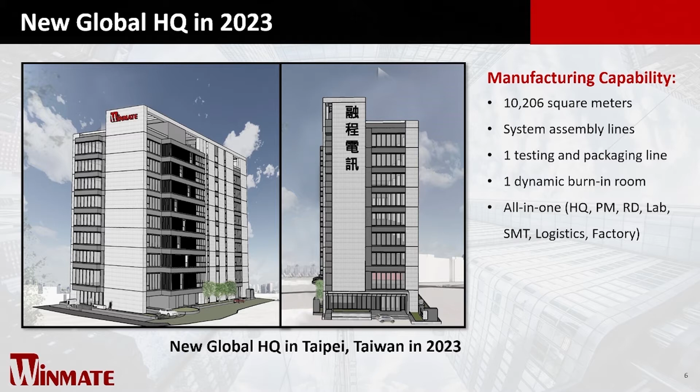Let's get on to business. The topic we are going to discuss today is heavy-duty applications.

Here's the agenda today. Firstly, I will give you a snapshot about the market trend, then I will introduce the heavy-duty industry and related challenges primarily. After that, I will talk about what target markets we are aiming at and how to overcome industrial challenges with our FM product family. At last, you will go over our successful stories and understand why Winmate is every customer's best mate.

IoT is one of the most popular terms in recent years, and the market for IoT has seen a somewhat unexpected acceleration. The number of IoT devices is at 7 billion in 2018, and the amount is expected to grow to 21 billion in 2025.

This number doesn't include smartphones, tablets, laptops, or fixed-line phones. Also, simple one-directional communications technologies such as RFID, NFC are not considered. The compound annual growth rate is 10 to 17% from 2018 to 2025.

The significant connection growth is mainly driven by IoT devices. Most specifically, IoT devices are both on the consumer side, such as smart home, as well as on the enterprise or B2B side, such as connected machinery.

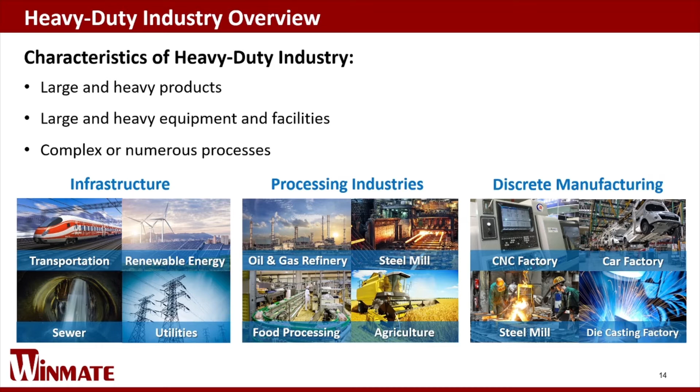Actually, IoT is everywhere, and it finds its way to different vertical markets and applications. In addition, it helps industry with data collection, data analysis, and real-time control, such as smart energy, smart manufacturing, public utilities, and many more. IoT has also been applied in smart energies with products like smart meters, which collect data automatically and apply analytics to track and manage energy use, such as solar energy, wind energy, power substation.

In the manufacturing field, IoT has proven to be highly beneficial with data collecting, sensors embedded in the machinery to warehouse shelves, allowing the workers to have a full track of all the problems and resources, thus making work more efficient, including oil refinery, steel plant, and power plant.

According to the public utilities, IoT can assist in collecting data from the environment. It will enhance security and promote IoT convenience like status monitoring, remote control, and facility management.

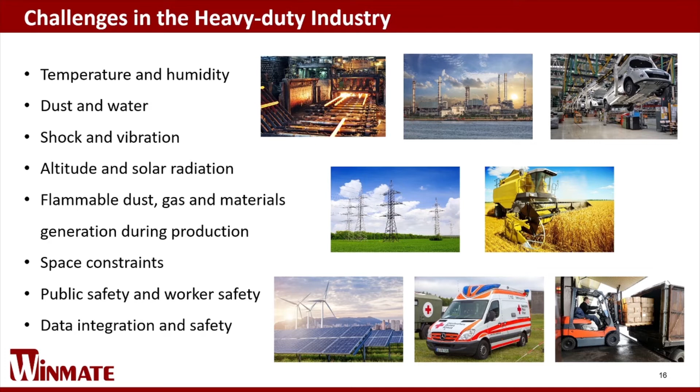However, we are still facing many challenges in different scenarios due to critical and demanding environment factors. These factors may be temperature, humidity, dust, water, vibration, explosion, hazardous materials, and they may make customers fall into dangerous situations or lose money. In order to overcome this issue and solve customers' problems, we may launch the versatile and ultra-rugged products for heavy-duty applications. I will introduce more detail later.

As I mentioned, the scope of heavy-duty industry is so broad that I will focus on heavy-duty vehicle applications. Other heavy-duty applications such as oil and gas, railway, IoT, or smart manufacturing have their own features or certifications. We will discuss those in another webinar topic.

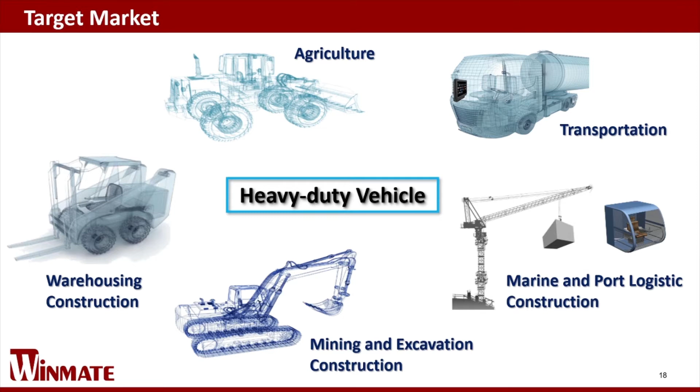Based on the thoughtful and rugged design of our panel PC, the FM product family will not only be adopted in the general vehicle market, but also in heavy-duty vehicle applications. The related vertical markets include agriculture, transportation, marine and port logistics, mining and excavation, warehousing, construction, and so on.

Tractor and harvester are suitable for farming and agriculture. Precision agriculture relies on advanced technologies such as field positioning via GPS. FM series panel PCs are equipped with external antenna for GPS to provide accurate positioning. Operators can use Winmate panel PC to show complete information such as landscape, soil type, plant species, schedule for seeding, watering, harvesting, or environmental variables.

Forklift is for warehousing and construction. The related purposes include asset management and tracking, inventory management, order selection and staging, distribution visibility, shipping and receiving, or working tasks.

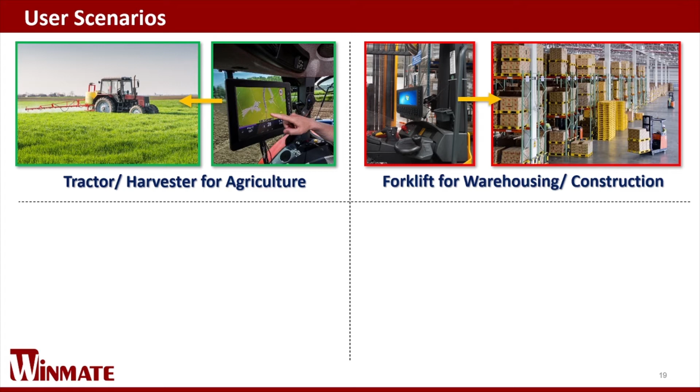Each forklift is outfitted with FM series panel PC, supporting wide range power input from 10 to 60 voltage with ignition control. Every time the operator moves an item into or out of a warehouse, they simply scan a barcode and enable real-time pallet tracking via ERP systems. When there is a forklift breakdown, the user can detach the device from the dock and then move it to another spare forklift, dock it, and it's ready to go.

When the display cracks or panels break, the user can replace the front panel in the field to reduce service costs and prevent productivity loss. Whether using Winmate FM series panel PC in the crane for port logistics, excavator for mining, or building construction sites, it can help our customers enhance efficiency and accuracy, improve productivity, and minimize error.

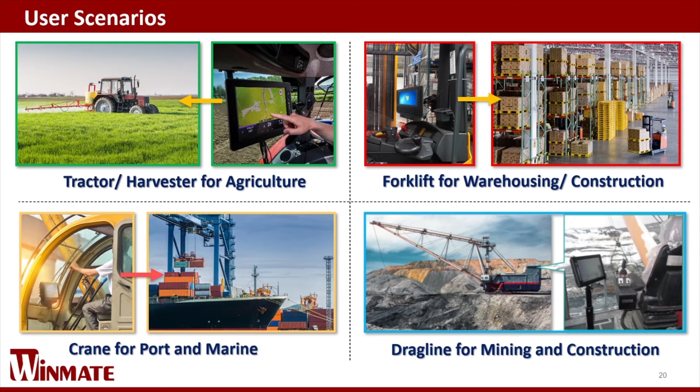The FM series panel PC with docking delivers full computing power without compromising space in the cabin. It guides crane or excavator operators in real time to eliminate unproductive moves and increase handling capacity.

Besides heavy-duty vehicle applications, our product can definitely be used in the general vehicle market, such as bus, police car, ambulance, taxi, fire engine, or truck separately. Some of our products even combine with cameras to enable more artificial intelligence and business intelligence applications.

Smart transportation solutions include elementary systems such as car navigation, traffic signal control, container management systems, and many more. It also includes advanced technologies that provide real-time data such as parking guidance and information systems, weather information, among other customized solutions. Evolution of smart transportation has resulted in several technological solutions across the globe.

These solutions include real-time navigation systems, accident aversion, and smart parking guidance, detecting traffic and rerouting traffic based on road and weather conditions, and so on. Smart transportation tools also allow users to track and manage fuel consumption. All these solutions have boosted the comfort and safety of passengers, which is a major aspect of the Smart City project.

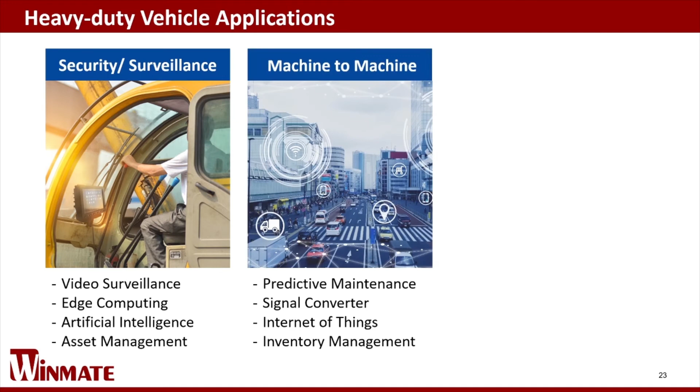I primarily divided heavy-duty vehicle applications into three classifications: security and surveillance, machine-to-machine diagnosis, and management.

Through integrating cameras and computers, we can decrease accidents by edge computing and AI applications. We can also enhance asset management and the security of the driver, passenger, pedestrian, and other vehicles. Even if an accident happens, people can handle and solve it effectively.

With the benefit of Internet of Things, devices and computers can proceed with data transmission, signal transformation, and predictive maintenance. Through data collecting, people can use data analysis tools and techniques to detect anomalies in operation and possible defects in equipment and processes, so we can fix them before they result in failure.

Also, we can depend on GPS tracking devices to monitor the driving speed of the driver and improve fleet management and route optimization.

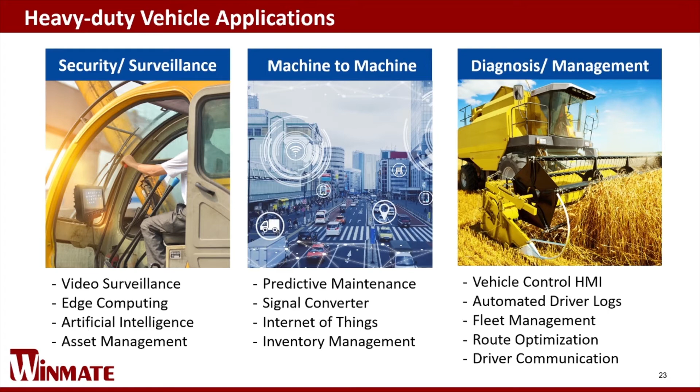FM series have 5 features mainly to adapt to heavy-duty vehicle applications. Firstly is the specific I/O port or interface to meet customized requirements. Then there are wide-range power input with ignition control, mounting ways, IP rating, and rugged design, in order.

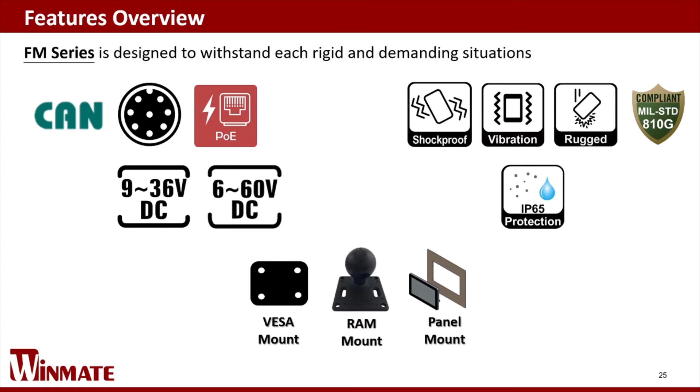Based on these designs, suppliers can create value for customers to help them receive real-time information, enhance efficiency and accuracy, improve productivity, and minimize errors. We will have an advanced illustration in the following pages.

The first criterion is the CAN bus interface. Through the CAN bus interface, the computer can communicate with the engine control unit directly to get vehicle-related information, including tire pressure, engine health, battery voltage, and so on.

Secondly, vehicles sometimes cannot offer stable power input. The car may even stall or shut down suddenly, so the computer must have wide-range power input from 9 to 36 volts or 6 to 60 volts with ignition control to protect the system itself. For heavy-duty vehicle or railway applications, the voltage even needs to be designed up to 48 volts, 72 volts, or 110 volts.

Thirdly, devices need to support intuitive and convenient mounting methods such as VESA mount, RAM mount, and panel mount. Therefore, the user can install it everywhere.

Finally, you can imagine when a car is moving, it must encounter strong vibration and shock. Also, dust and moisture are unavoidable. Due to these conditions, our vehicle mounting computers have corresponding design and protection, and pass military standard tests for vibration and shock resistance. Let's see the FM07 series.

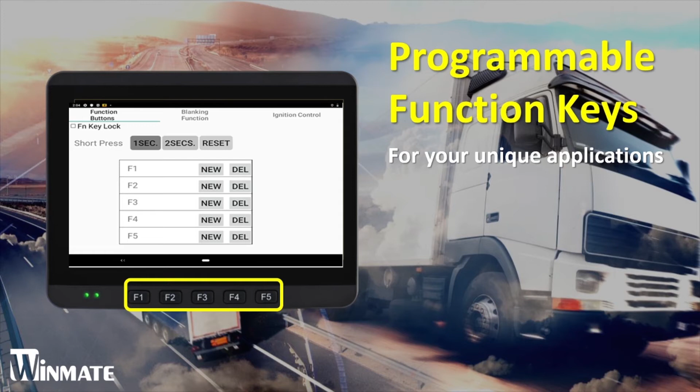Besides the VMC features I've mentioned, these two rugged products are ready for changing rigid and demanding environments from -20 to 60 degrees. They also have a programmable function key so customers can promote efficiency for their unique applications, such as reset, emergency, or anything else.

Thanks to PCAP technology, our products can deliver excellent responsive performance by supporting multi-touch, allowing anyone to operate it easily with different modes. Intuitive operation with maximized use of the screen surface lets users scroll, tap, zoom in and zoom out images to promote advanced productivity.

The focus of the Internet of Things is on drive control, sensor detection, network control, information processing technology, and even the latest robot technology. Information processing technology is the soul running through the entire IoT. In addition to the need to provide a stable and reliable industrial computing platform, the harsh and complicated operating site environment also places special requirements on facilities and equipment.

With comprehensive connecting ways, users can access and share timely information for diagnosis, management, or other BI applications. Our panel PC supports Wi-Fi, Bluetooth, and GPS, so customers can stay connected wherever the job takes them.

You can regard our FM07 series as a combo meal, with its own unique selling points and features. This combo meal includes French fries or beverage, just like the features I've mentioned before. If you want to upgrade the combo meal, you can choose our FM08 or FM10 series according to your project requirements.

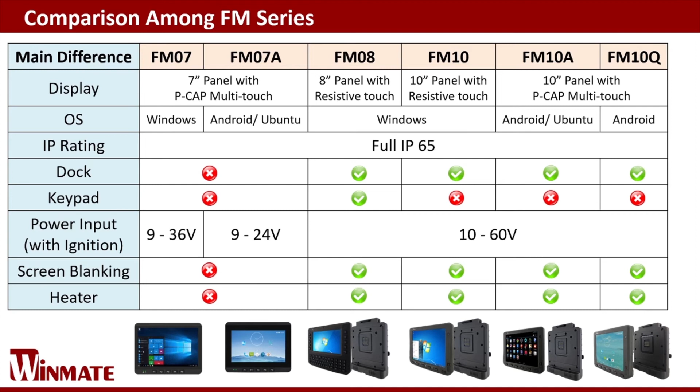According to different vehicle types, the model supports a wide range of power input from 9 to 24 volts, 9 to 36 volts, to 10 to 60 volts. For dark screen blanking and heater features, only FM08 and FM10 series support these functions. Users can choose the appropriate model according to their scenario and budget.

Compared to other suppliers and competitors, our products have 15-year long life support. Based on our excellent and professional background, we grasp the domain know-how in each vertical market and pass the corresponding certifications such as anti-explosion, medical applications, vehicle, railway, military, or marine. In addition, we prioritize the quality and reliability of products and offer flexible, modular design and customized service. The most important thing is that we have alliance ecosystems and global partners to offer unique and amazing solutions to our customers.

Let's go over our successful stories. In this case, the customer used our vehicle mounting computer FM07 in public transportation for surveillance, security, and passenger information systems. Our product supports CAN bus interface, wide operating temperatures from minus 20 degrees to 60 degrees, wide power input from 9 to 36 volts with ignition control, programmable function keys, and passes the E-mark certifications.

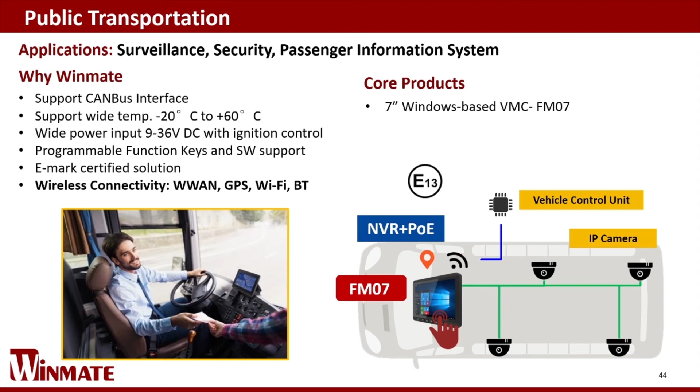On the other hand, wireless connectivity such as Wi-Fi and GPS are necessary and useful. It can help devices transmit data to the control center for route optimization, driving speed monitoring, or managing fuel consumption and idle time.

The concept of Internet of Things has been implemented in almost every aspect of warehouse management. The IoT interconnects all the moving parts and ties your logistics together, bringing countless benefits. The movement of inventory is trackable and traceable. The data collected can be leveraged for manufacturers or operators to make precise decisions. Operational downtime can be prevented, etc.

From inventory management to order fulfillment, asset tracking, and shipping or receiving, logistics ecosystems require real-time data collection and communication from the production line and warehouse floors to keep things running smoothly. Forklift truck drivers and warehouse workforce equipped with the right automated technology that enhances mobility will help minimize errors, streamline ordering and inventory management, and improve operational efficiencies.

A world-leading forklift and truck lift manufacturer in the USA was looking for a vehicle mounting computer solution to enhance its inventory management. Their needs included a rugged panel PC with excellent quality and high computing performance for inventory management, tracking, and handling complex material flows. At last, Winmate won the project and provided the 8-inch rugged panel PC FM08. Around 100 units have been deployed.

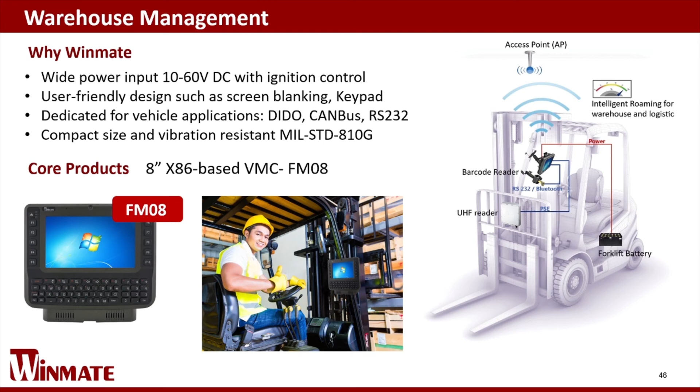The manufacturer is now looking for more opportunities to work with Winmate to drive the business forward.

Waste management service can be seen in nearly every residential and commercial area. However, the conventional operating processes often lead to inefficient management performance on account of outdated manual collection measures and logistics processes, which lack efficient data-driven solutions.

The rapid urbanization across regions and the concept of IoT have contributed to the emergence of smart waste collection. The management solutions are made possible by the applications of technologies like IoT sensors, RFID, GPS, and cloud-based software for intelligent monitoring, route optimization, and data analytics.

A smart waste management company in UAE catering to millions of residents through municipal service deploys the IoT measures mentioned above, yet they were looking for a rugged Android-based vehicle mounting computer to help integrate the data collected through the sensors and RFID readers and communicate with the command centers to take their truck tracking systems to the next level.

The customer purchased FM10A to serve as the in-vehicle data collection and communication terminal. The FM10A's wireless capabilities improve productivity by leveraging the data collected from the vehicles and transmitting it back in real time to the cloud-based smart tracking systems and command centers.

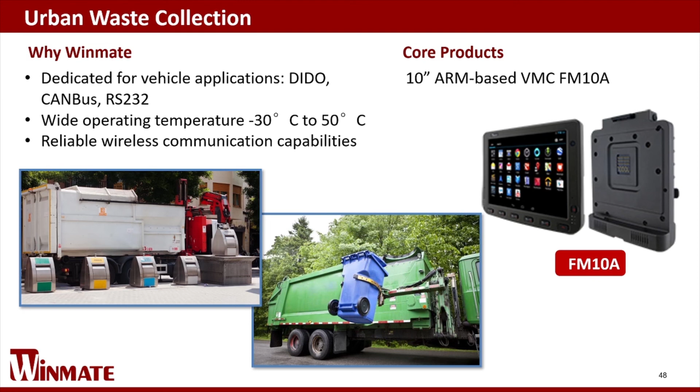Two years of deployment saw a 30% decrease in the waste collection cost.

The growing complexity in transportation management is driving more logistics operations to explore their mobile options, whether they want to monitor their assets and human resources more efficiently, route and schedule their trucks, or enhance the service level provided by their customer-facing employees. Shippers are turning to mobile tools to help achieve these and other goals.

The integration of connected vehicle technology into the trucking sector presents enormous potential for creating safer and more efficient roadways.

Winmate provides flexible vehicle solutions for conventional fleet management to perform location tracking and task management. For this case, we offer strong software support for wireless communication. Then we passed the test of MIL standard 810G.

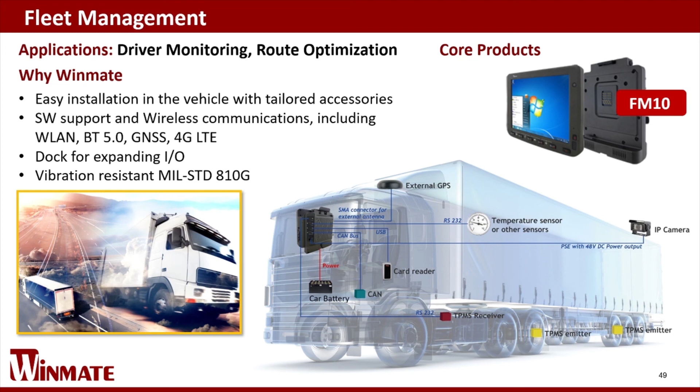The most important thing is that we offer customers a one-stop service and a complete solution. This is why we won the project eventually.

Modern agriculture deploys more and more computing technologies to increase production volumes, ease harvesting, and navigate around the field. Vehicle computers are a core element of modern farming machinery, such as combine harvesters and tractors.

The task of those mobile telemetry control systems typically includes GPS-controlled fleet management, data acquisition of harvest humidity, data storage, and displaying the video feed from external cameras. We design waterproof and vibration-resistant computers for agricultural vehicles.

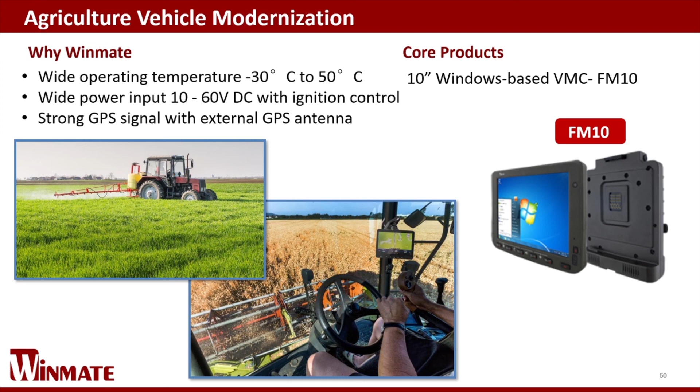As mentioned, our products were adopted by customers in multiple vertical markets worldwide, such as industrial automation, military, vehicle onboard diagnostics, oil and gas, and many more.

Clients can trust quality, reliability, and durability for all Winmate's products. Also, we prioritize offering excellent customer service and after-sales support for customers.

Winmate offers a one-stop shop and service to customers. Customers find it easy to integrate and can use a cheaper price to get our package solutions together. If our standard design does not meet your requirement, we still can customize the product for you.

In customers' projects, we always show our ability to overcome different challenges and eliminate concerns from the customer. Likewise, if you have any potential projects on your hand, you are very welcome to discuss it with us. We aim to offer the appropriate proposal for your needs.

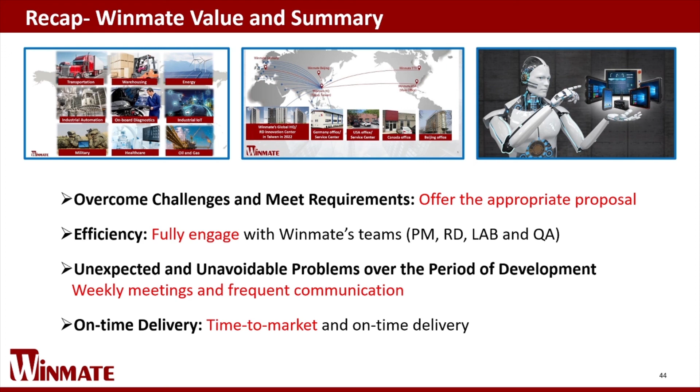Customers can fully engage with Winmate at all times. During the development period, we may meet unexpected and unavoidable problems, but we will fix it through standardized weekly meetings and frequent communication. At last, we will make sure the product's time to market and that it can be delivered on time. Based on what I mentioned above, we are confident in helping our customers with any projects.

Here's today's sharing of heavy-duty vehicle applications.